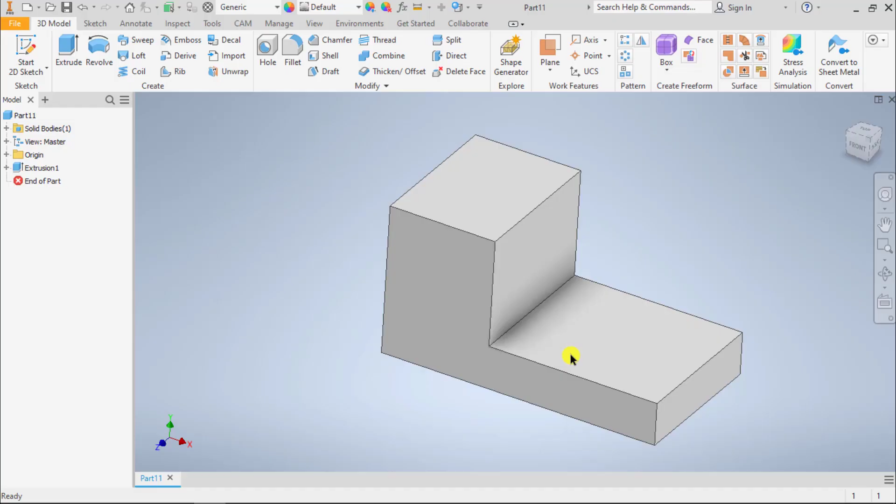Now, this is a little tricky because it is kind of missing a dimension, and it's going to make you kind of go off of an assumption that we know that our entire part on all of these Normal Orthos 1 through 10 are 1 3/4 inch tall.

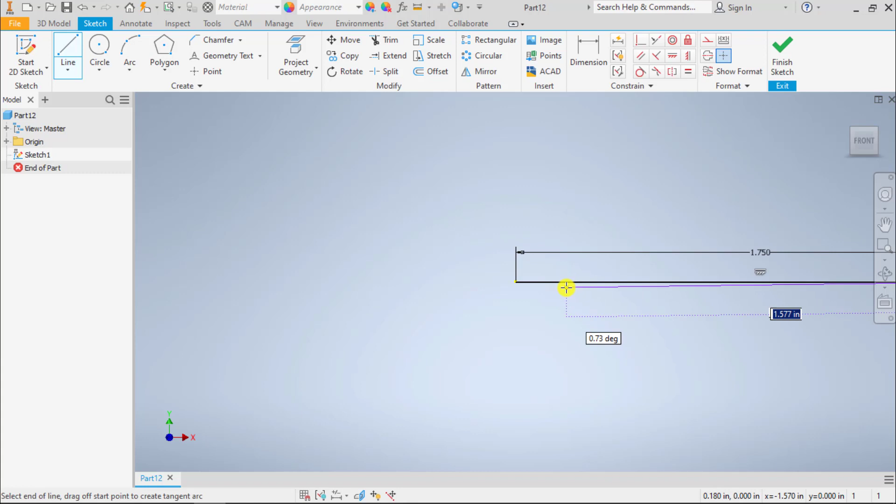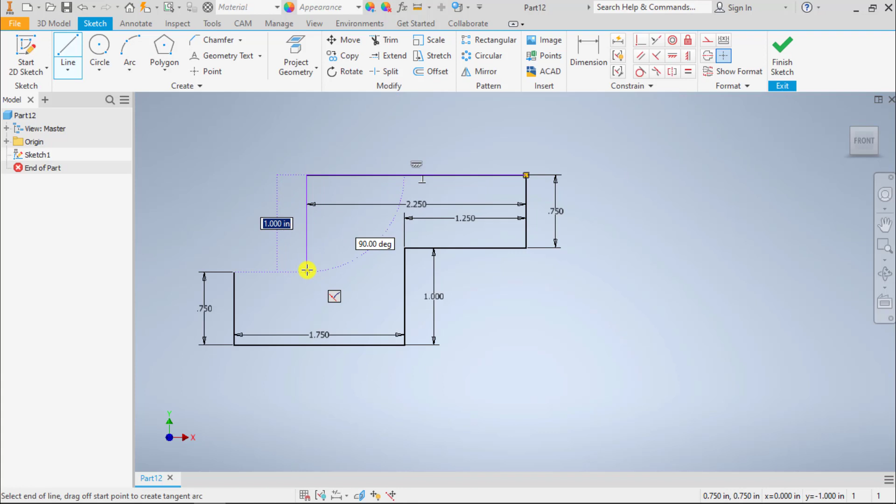So let's go ahead back to Inventor, and we're going to draw a 1 3/4 inch line, and then come up 1, over 1 1/4, up 0.75, and then we know that this is 0.75. This length here is 2 1/4. And then down to our 3/4 inch line and back to close.

Finish sketch. And then we just need to extrude 1.75, and since our symmetry is in the direction of our extrusion, we're going to make that extrusion symmetric, and then we're going to hit OK.

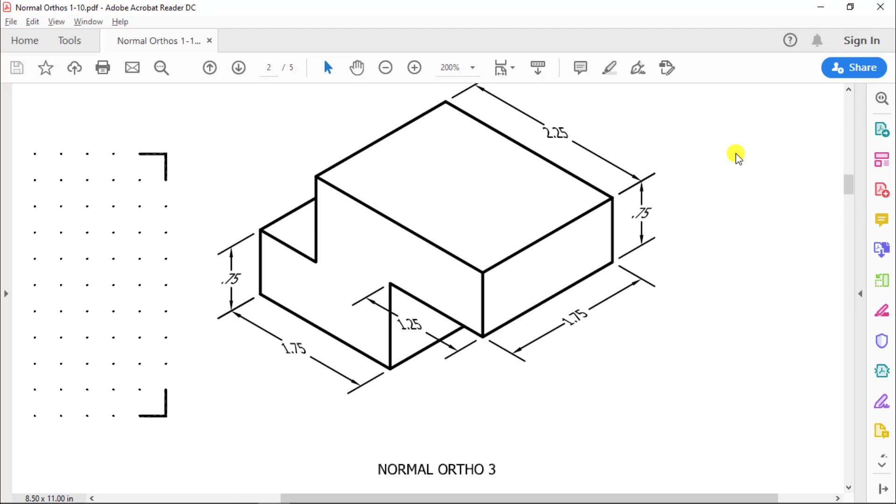So one of the things that I like to do when I go to double check my parts is to kind of compare where the lines go. So for example, this line here starts at this corner and goes back, and it leaves a little bit of a vertical to get to the top. If we pop back, we can see that indeed when I'm at my home view, which is my isometric perspective, from this point, this line over does leave a little segment. So it kind of is just a quick double check.

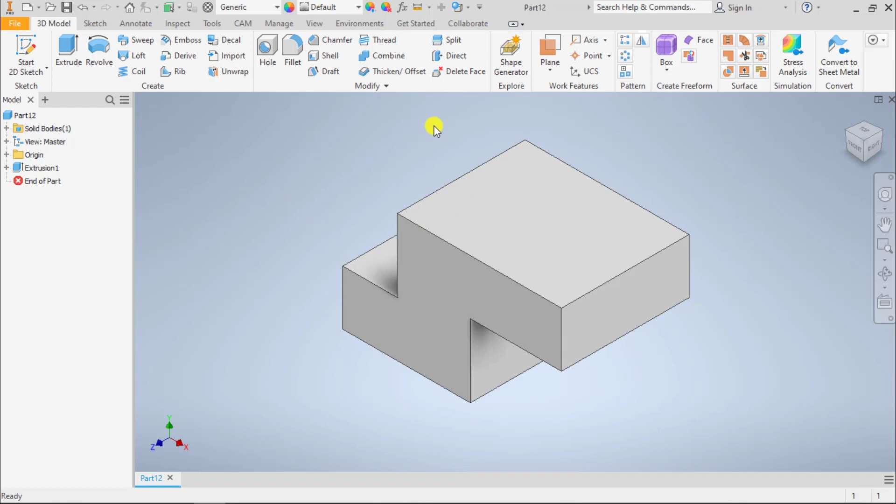If I saw this line coming too far this way and a lot longer of a segment here, or if this was pushed further out and it came back more, then I would know there's a problem. So it's just kind of a quick double check.